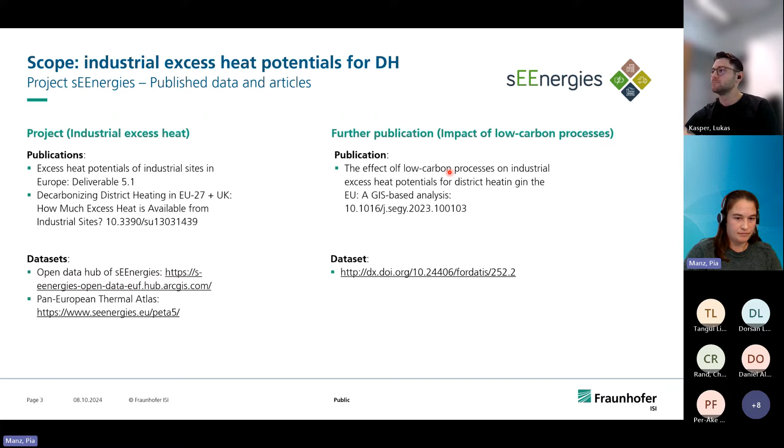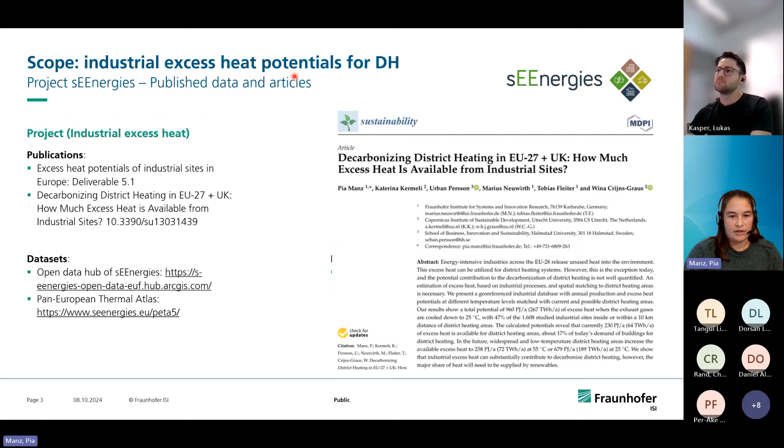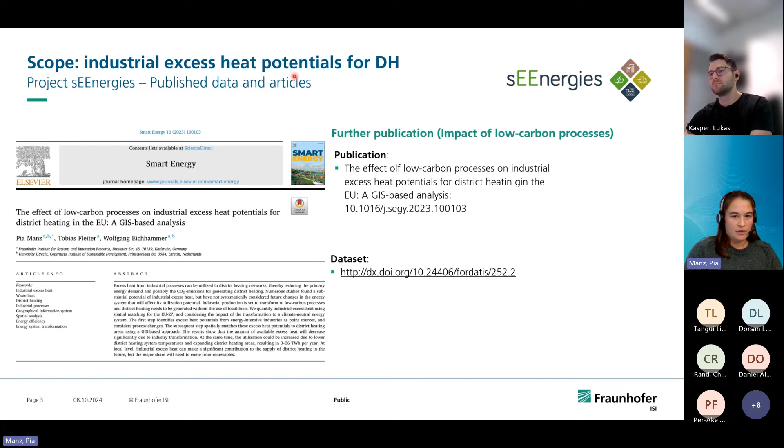With both of these publications, there are open data sets, where you can find the links down there. So first, there's the deliverable of the project, the D5.1 about excess heat potentials, which we published also in a journal article. And then one step further, we also analyzed low carbon processes and their impact on the excess heat potential in the EU. That being said, I will go to the content now.

The method, short overview, it's a stepwise approach. I will go into each of these steps very shortly in the next slides. It's covering EU 27 and UK. As a first step, we constructed the industrial database where we have plant-specific information on the process with coordinates. We then selected relevant processes and multiplied them with excess heat factors for different assumptions, and ended up with 1,600 sites that have excess heat potentials, and we mapped them with district heating areas.

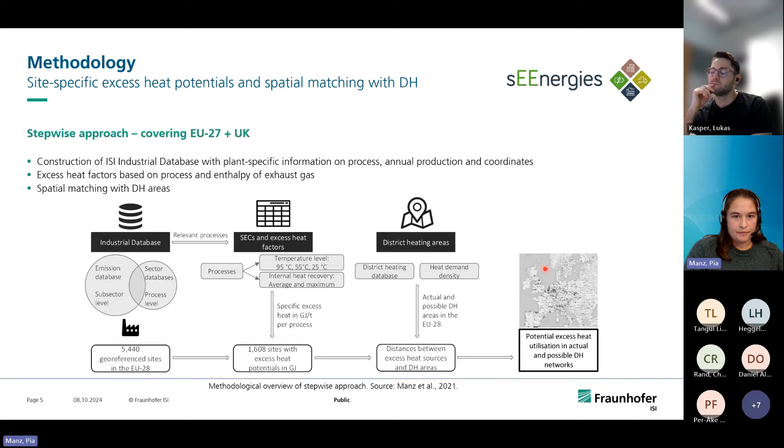In the end, we can say what's the potential excess heat utilization in current and future district heating networks, so actual and possible district heating. For the first step, briefly about the industrial database. There, as I said, I'm sure it's more than 5,000 industrial sites listed.

It's based on the EU ETS and the E-PRTR register, and also sectoral databases where we retrieved site-specific data. The coordinates were really important, which were part of the E-PRTR database, but of course there are data gaps and we need to fill them, which was manual research. We also have the company address and the greenhouse gas emissions. For each site, we have listed the corresponding plants with information on the process, the production capacity, and also the age of the plant.

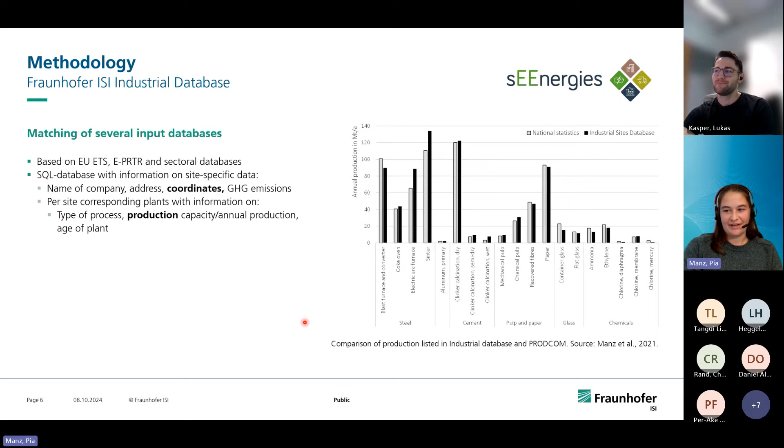The quantification of the excess heat is of course based on several assumptions and different scenarios to capture also future developments. For each process we have in the database, we define specific energy consumption values and excess heat factors that are based on the exhaust gas composition and the temperature level where the excess heat is recovered. This method is also the base for the analysis of electrification and hydrogen-based furnaces in the future, and the new corresponding excess heat factors.

In the end, we have excess heat potentials for 29 different processes in 1,600 sites. At these sites, there are 2,600 plants from the energy intensive subsectors, so iron, steel, non-ferrous metals, glass and cement production, so non-metallic minerals, pulp and paper, the chemical and the refinery industry.

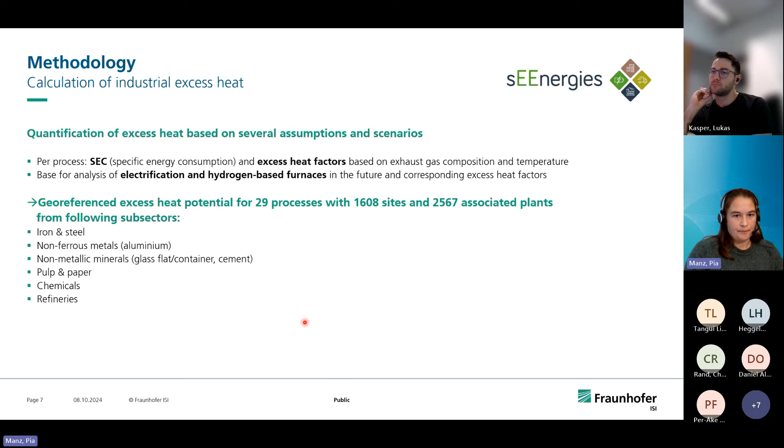For the matching with district heating areas, we have point sources which represent the excess heat potentials, and then we analyze the distance to the district heating areas with different expansion levels of district heating. So we looked at the current situation and then at the future situation or expansion that could be possible of district heating, which makes the distance less in the case that district heating will expand.

So the analysis is for the current status and different scenarios differed by the expansion of district heating and the temperature level decrease of district heating. So then we can quantify the effect on which temperature the excess heat is recovered at the industrial site. Then also we respect the efficiency progress in industrial processes and also transformation of industrial processes, so electrification and hydrogen-based furnaces, as I said.

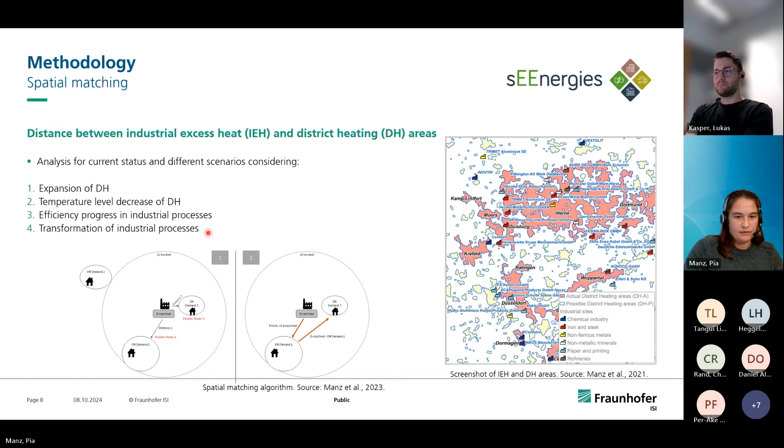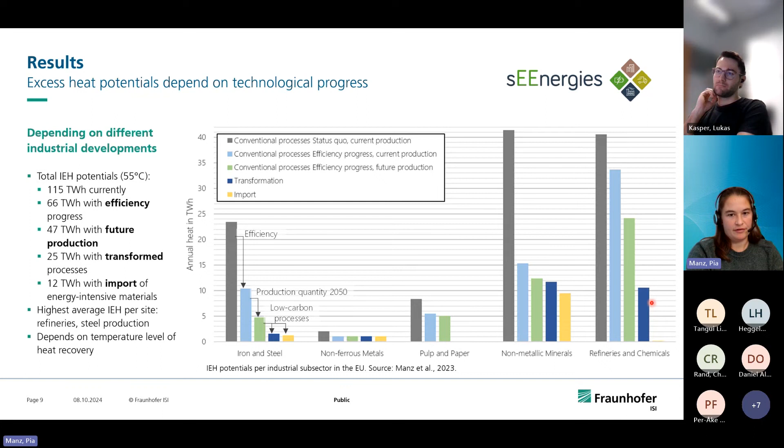In general, the highest average industrial excess heat per site is found at refineries currently. So of course now refineries are a really interesting source of excess heat, but we have found also that it will decrease drastically in the future if they all transform to efficient and low carbon processes. And of course, it depends on the temperature level of heat recovery. If we further decrease the temperatures in the district heating systems, the more energy we can recover and utilize in district heating systems, which leads me to the next slide.

So here it's the utilization of the excess heat potentials in district heating systems. It respects now the spatial matching to current and future district heating areas. And we can show that 35% of the available excess heat from industry could already be utilized by current district heating areas when we respect the distance and annual available heat.

So that often if you have a large industrial site, it's more than the district heating demand which is close by. When district heating is expanded ambitiously, so the possible district heating here, the orange columns, it increases the amount of excess heat that could be utilized, so it's 75% of the excess heat. So I inserted here the current level, you could say, of excess heat potentials for district heating. So it's conventional processes matched with current district heating areas.

And if we look now at decreasing the temperatures to 25 degrees, which is really low, I know. But if you utilize the excess heat at 25 degrees from transformed industries and expand district heating very ambitiously, you could compensate the excess heat decrease by the transformation, which I've shown in the last slide.

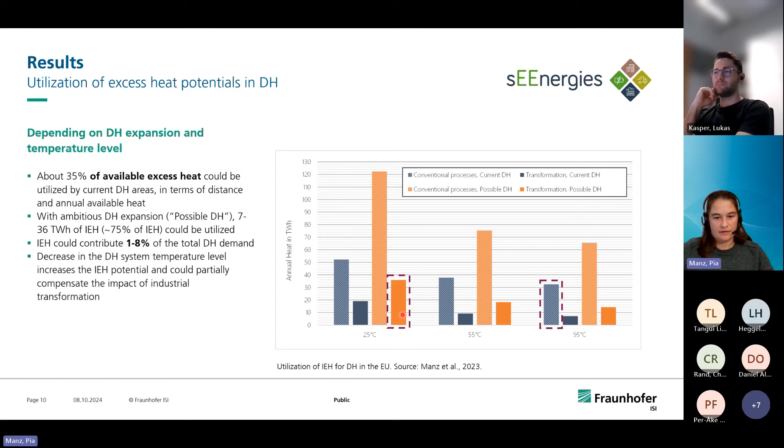In total, the industrial excess heat can contribute 1 to 8% of the total district heating demand. So all over Europe, when you look at the numbers, it's a small part, but locally it can be a lot. Yes, that decrease can be compensated. Yes.

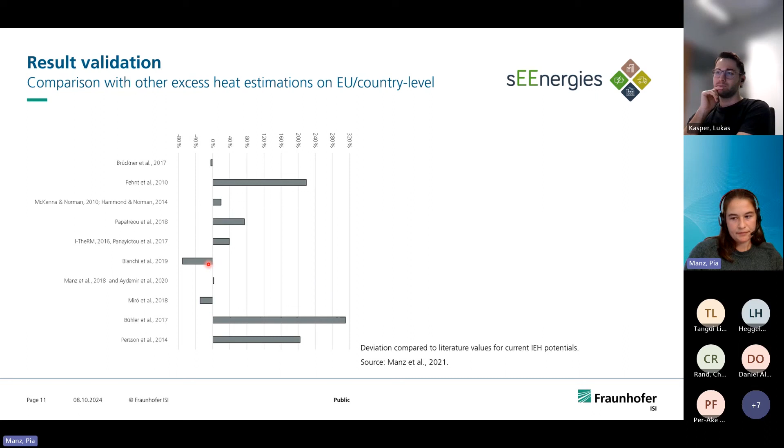Coming to the conclusions, yes, the industrial excess heat utilization for district heating depends on the level of transformation. Currently, we have a large potential. It will change. The largest potential currently is from refineries, from steel production, and from the minerals, so cement and glass production. The energy efficiency progress in industry leads to about a 40% decrease of these industrial utilization potentials. And the transformation to low carbon processes is even more, a 20% decrease. So this is the lower limit, as it's a conservative approach. And we assume here a full transformation of industry.

The expansion of district heating areas leads to the fact that most sites are located within 10 kilometers, and most of them even within 2 kilometers, of the industrial excess heat sites. And lower district heating system temperatures increase the heat that can be utilized by 30 to 170%, depending on the assumptions. And as I said before, the total contribution of the industrial excess heat to district heating demand is 1 to 8%.

Shortly, the limitations of our study: we don't look at the seasonal variation, so no seasonal mismatch between the demand and the supply. So you could say we assume a large seasonal storage. Other industries, so smaller processes, and also new processes like methanol synthesis and electrolysis are not in the scope. So there will be future excess heat potentials.

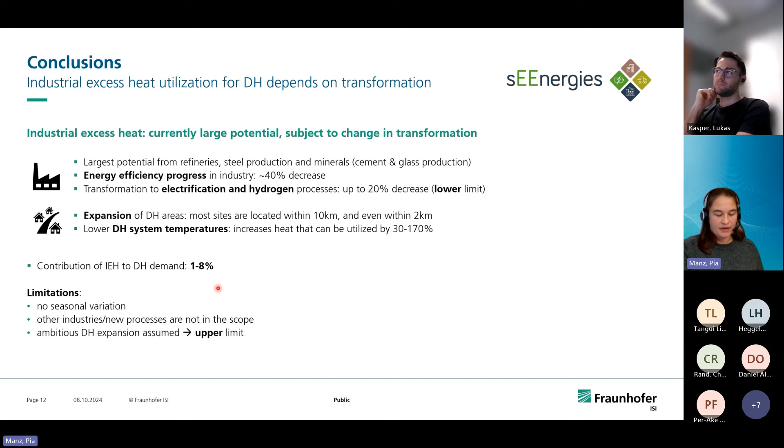A short outlook: as I said, industrial excess heat is one pillar in the transformation, but it will not be the only one for a climate neutral district heating supply. Efficiency and expansion in district heating areas can compensate the possible decrease of the industrial excess heat potentials, but still other sources are needed. Even though in individual networks or on local level, industrial excess heat can supply large shares or even completely the district heating demand on annual level. On country level, other sources will mainly supply the future district heating.

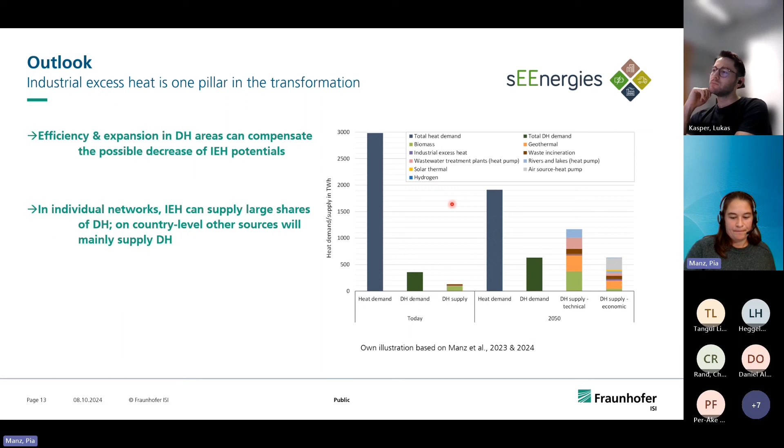And there I've shown a short outlook on 2050 with different sources that are suitable for a climate neutral district heating supply. And that's it from my side.